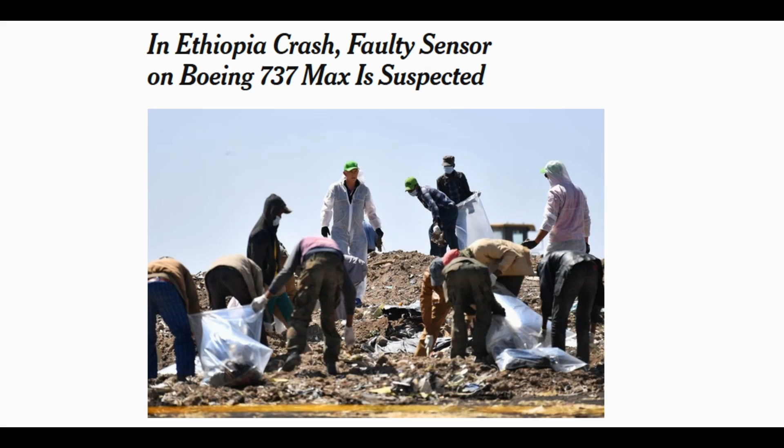Today I'm going to talk about what's going on with the 737 MAX. As you probably already know, the 737 MAX, the latest plane from Boeing, has suffered 2 fatal crashes in the last 6 months, and the news media is blaming something called MCAS.

Now, if you've been following this as closely as I have, you're not going to learn anything new here. But if you're only getting bits and pieces of the story, or if you're confused by what you're hearing, maybe I can untangle some of that spaghetti.

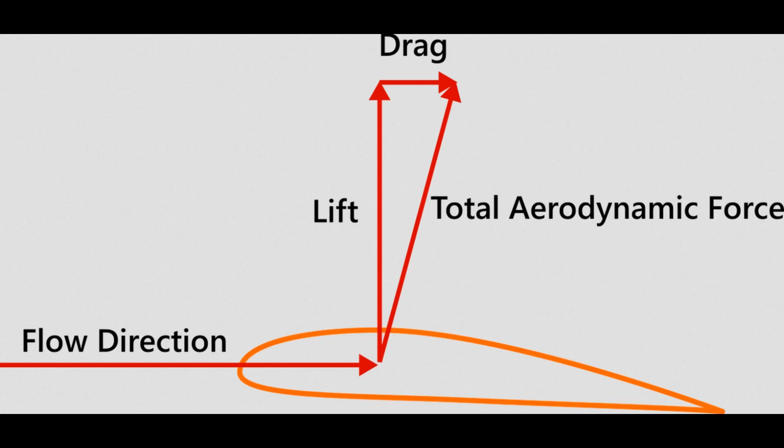I need to begin with some basic aeronautical engineering 101. Now, for you old hats with airplanes, this is going to be nothing new. You can skip ahead a little bit, but we need to understand some basic aeronautical principles before we can understand what the problem with the 737 MAX is.

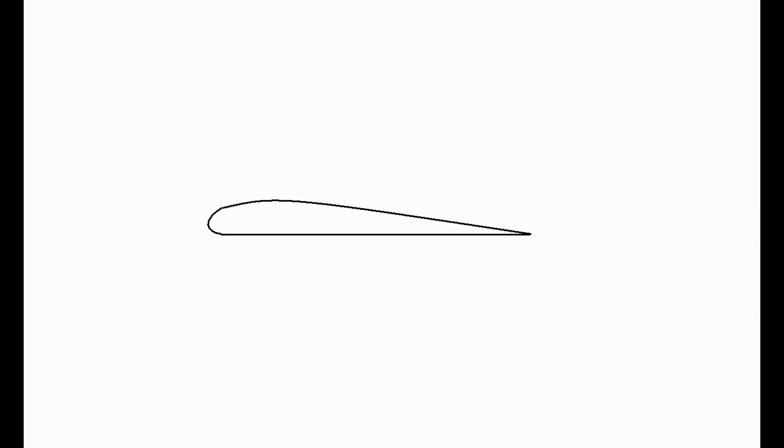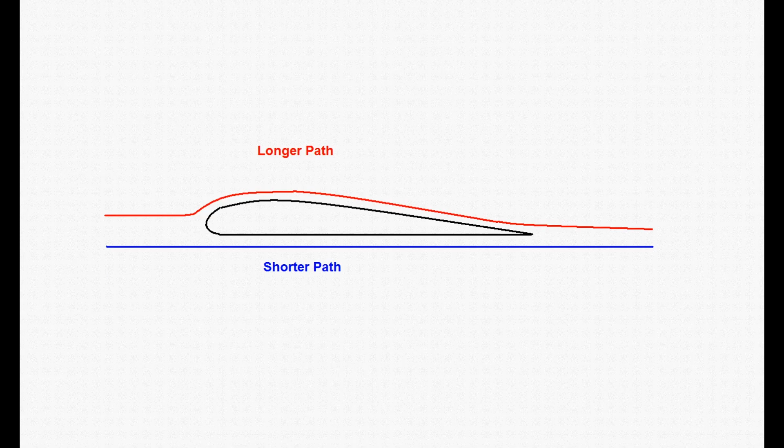I need to start out by getting rid of an old myth, and that is what makes an airplane fly. Now, what you've seen in textbooks and heard on the science shows is only a small part of the story, and that story is that an airplane flies because of the shape of the wing. The story is that the air going over the top of the wing, which is more curved than the bottom of the wing, has to go a greater distance and therefore has to go faster than the air going over the bottom of the wing.

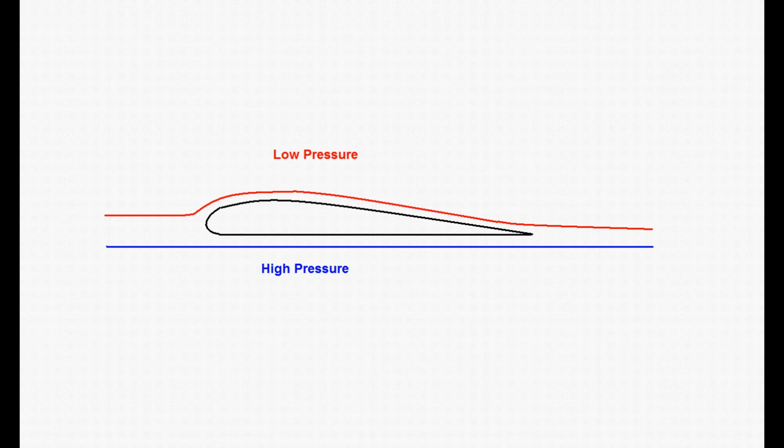And because the air is going faster over the top of the wing, it has a lower pressure, so we have a low pressure on top of the wing, a high pressure below the wing, and that causes the wing to go up. Well, this is true, but it's only a small part of the story, and the faster a plane flies, the less of the story it is.

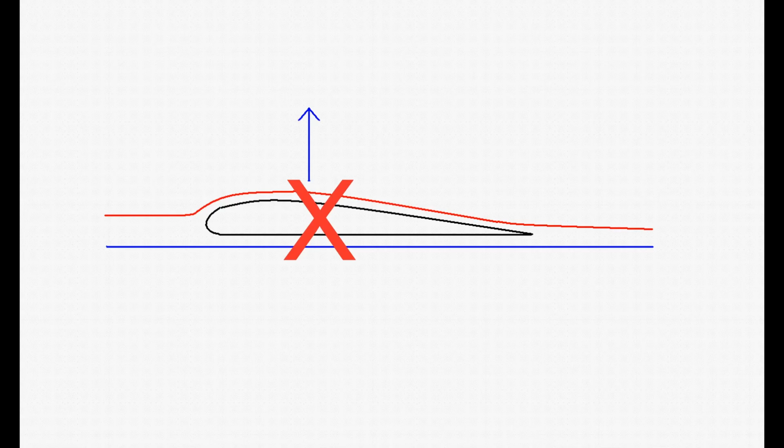So planes that tend to fly slowly have this rather highly curved top of the wing, which gives us more Bernoulli effect, but this also causes a lot of drag. So planes that fly faster have a more symmetrical wing shape and rely much less on the Bernoulli effect to fly. So what really causes an airplane to fly?

The main force, especially on planes that fly at higher speeds, is the fact that the wing diverts the air downward as it goes through the air. So the wing deflects the air downward, and because of Newton's third law of motion - for every action there is an equal and opposite reaction - pushing the air down pushes the wing upward.

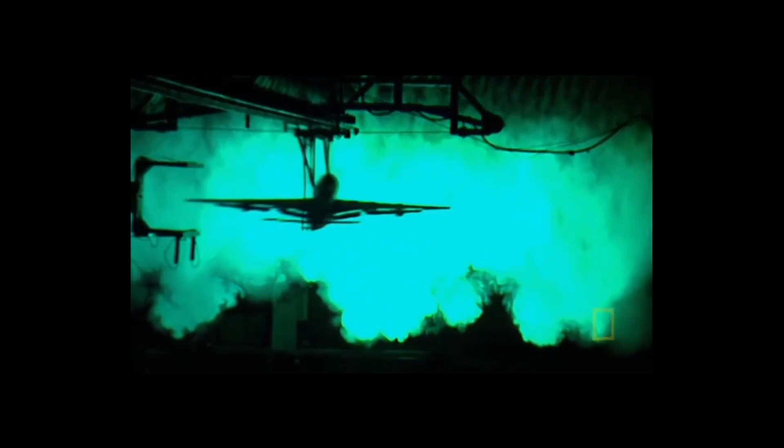And we can see this in this quick video here showing an airplane going through a fog curtain. Look at how much the air is pushed down as the airplane moves through the fog curtain.

So an airplane flies for much the same reason that a rocket flies. A rocket forces gases out the back, and that causes the rocket to go the opposite direction. The wing of an airplane forces air downward, and that causes the wing to produce lift, which makes the airplane fly.

The idea is to fly in level flight. You want the wing producing exactly the same amount of lift as the weight of the airplane so that the plane will stay in the air. To climb, we have to produce more lift, and to descend, we have to produce less lift.

There are 2 ways to change the amount of lift the wing produces. One is to change the speed. So if you go faster, the wing produces more lift and the plane will tend to climb.

Or you can change the angle of the wing to the oncoming air. This is called the angle of attack, not to be confused with the pitch of the airplane. The angle of attack is the angle the wing strikes the air as opposed to the angle that the whole airplane strikes the air.

So as you increase the angle of attack, or the angle of the wing to the air, you produce more lift. So at the same speed, to produce more lift, you need to angle that wing upward. As we increase the angle of attack, we increase the lift, but this only works up to a point.

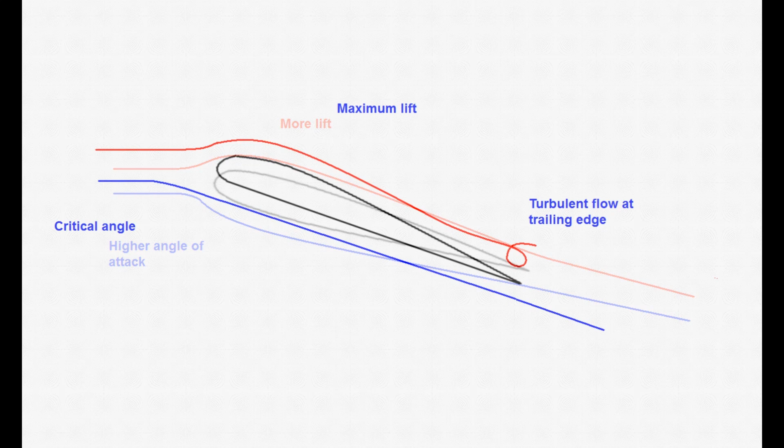When we reach a certain angle, known as the critical angle, increasing the angle of attack no longer increases the lift, and then we reach a point where increasing the angle of attack decreases the lift, and this is called a stall. Depending on the design of the wing and the speed and other factors, this stall can be rather mild or rather abrupt.

In fact, a lot of modern planes are designed with the wing twisted in such a way that the root of the wing will stall first, easing the abruptness of a stall and also giving the pilot some warning that the plane is stalling.

And in fact, some of the turbulent air that comes off the wing during a stall will cause the plane to shake. Modern commercial aircraft have what's called a stick shaker, a motor attached to the controls to enhance this shaking and let the pilot know the plane is about to stall. Regardless of the cause or severity, stalling an airplane is a bad thing, unless we are stalling a light plane to practice recovering from stalls.

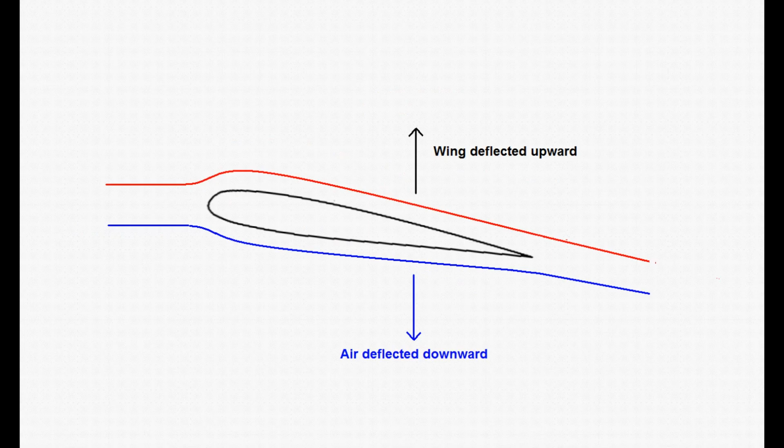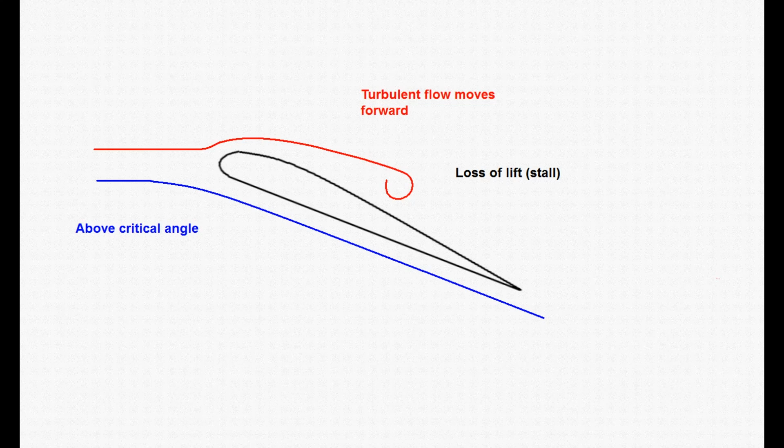So what we have learned so far is that an airplane flies because the wing deflects the air downward, and the higher the angle of the wing to the oncoming air, the angle of attack, the more lift we have, all other things being equal. But if that angle gets too high, we lose our lift and the plane falls, which is a bad thing.

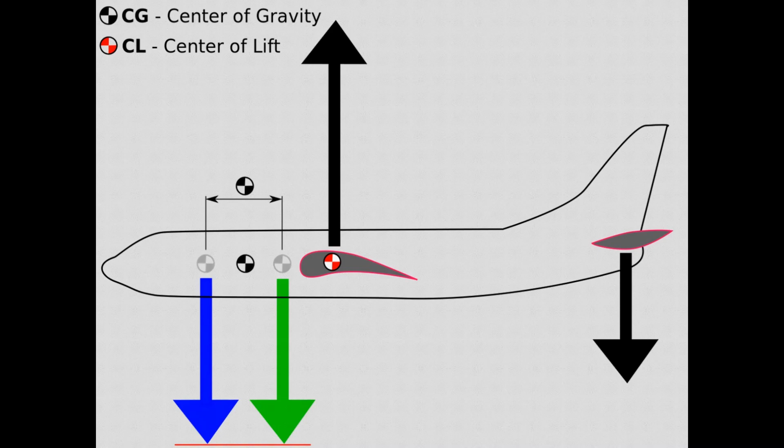The next thing we need to look at is the stability of the airplane. A plane is stable when, if it departs from straight and level flight, it will tend to return itself back to straight and level flight. Most airplanes are designed with stability in mind. Military fighters aren't so stable because we want them to be maneuverable, but a passenger plane needs to be stable.

In most aircraft, the stability of the pitch angle, that is the up and down angle of the nose of the plane, is provided by the horizontal stabilizer, which a lot of people might call the back wing of the plane. If the plane pitches up or down, the oncoming air will push on the stabilizer and cause the plane to go the opposite direction.

So here we see the plane is pitched up. The wind is hitting the horizontal stabilizer in such a way that it produces lift. Notice it has a high angle of attack, and that will lift the tail back up. And of course, if the plane's nose goes down, we have the opposite effect, where the lift of the horizontal stabilizer is negative and tends to push the tail down. So the horizontal stabilizer keeps the plane stable in the vertical or pitch angle.

Now, passenger planes must be designed to be stable under all flight conditions. We don't want the plane getting into a condition where it becomes unstable, in other words, where it wants to depart from straight and level flight. So what we don't want is some condition that causes the plane to pitch up, because that will increase the angle of attack, and if we are already close to the critical angle, the plane could pitch into a stall. So that has to be avoided.

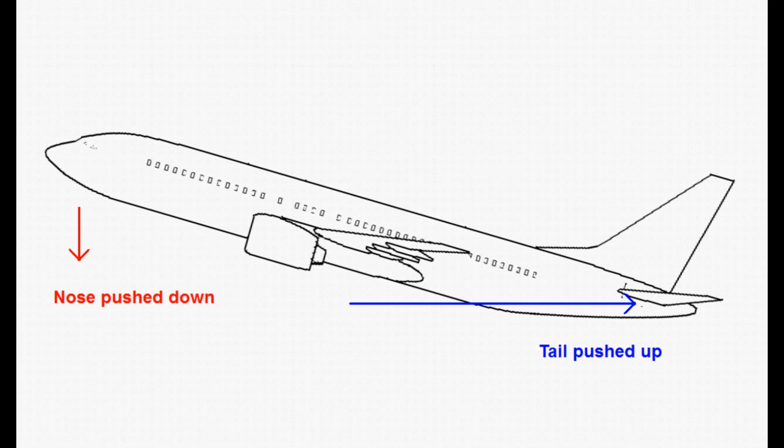So one thing that is an absolute must is planes must be designed to be stable. Basically, under whatever conditions are happening, if the pilot lets go of the controls, the plane will return to straight and level flight. And just a quick spoiler here, this is the problem with the 737 MAX. I'll talk about it in a moment, but there are conditions where the nose can pitch up, and that had to be solved. But before we talk about that, let's talk about flight efficiency.

The fuselage and engine nacelles of an airplane also produce lift. Anytime they are angled in such a way that the air hits them and is deflected downward, they are going to produce lift. But they are not efficient lift producers. The wings are designed to be very efficient lift producers. They are long and narrow. That's called a high aspect ratio.

And that produces lift more efficiently. In other words, its lift to drag ratio, the amount of lift it produces compared to how much drag it induces, is much higher than something shaped like the fuselage or engine nacelles.

So when the plane is cruising, we want the fuselage to be flat to the oncoming air so that it produces no lift, and the same thing with the engine nacelles. We want them to produce no lift. So the plane is designed so that in cruising flight, the fuselage and engine nacelles are flat to the oncoming wind, and the wing has a slight angle of attack, the angle most efficient for cruising speeds and altitudes. So we have what's called an incidence angle, which is the angling up of the wing compared to the fuselage, to give the wing an angle of attack when the fuselage does not.

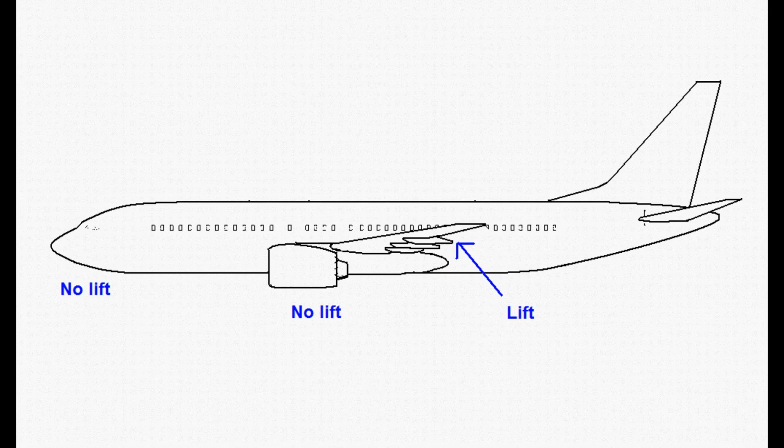When the plane is flying more slowly, such as shortly after takeoff or when coming into land, we have to increase the angle of attack of the wings to produce more lift at the lower speed. Well, to do that, we have to raise the nose of the whole airplane. Now, the fuselage and the engine nacelles are also producing lift.

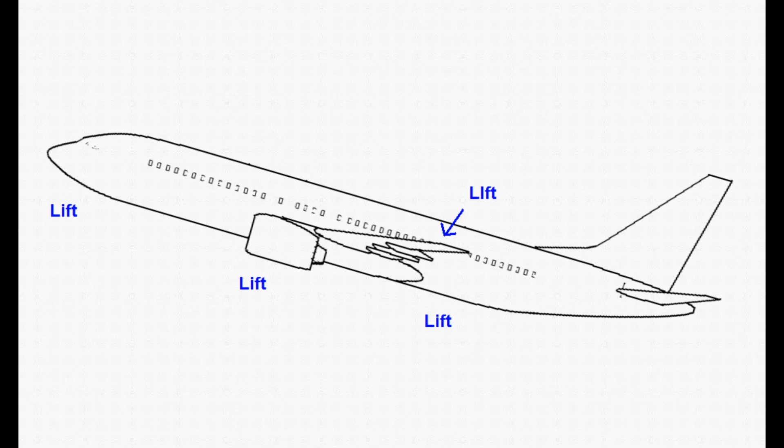Here's the problem with the 737 MAX. The original 737 was designed low to the ground and designed around the Pratt & Whitney JT8D engine.

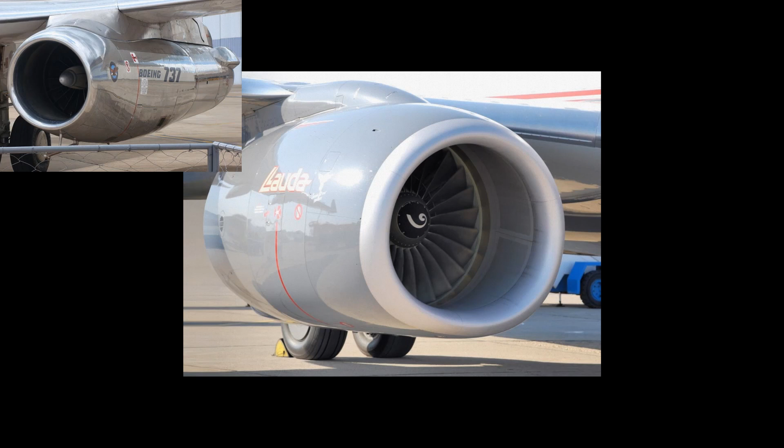To improve fuel economy, they adapted the CFM56 engine to later versions of the 737. To do this, they moved the accessory package to the side of the engine so they could flatten the bottom of the nacelle, and then to increase ground clearance, they had to raise the engine. But to raise the engine, they had to move it forward a little bit to clear the leading edge of the wing. They were able to do this without causing any stability problems of the airplane.

However, the LEAP engines that are put on the 737 MAX are even larger diameter than the CFM56, so to make them fit, they have to raise them even higher above the ground, and to clear the leading edge of the wing, they have to move them just a couple of inches forward of the CFM56 engine.

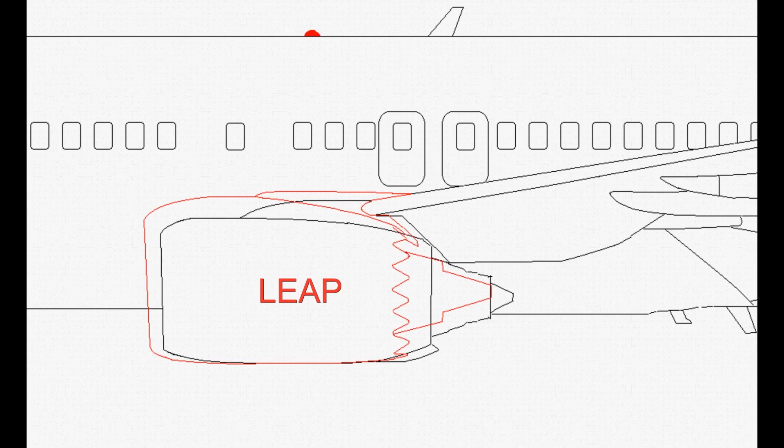The position of the LEAP engines on the 737 MAX tips the stability scales just barely in the wrong direction under just the right conditions. So under slow flight, with a high and increasing angle of attack, with the flaps retracted and the engines at high power, the wind can catch the engines just enough to pitch the airplane up and cause it to stall.

You simply cannot have an airplane doing this, so it would have been impossible to adapt the LEAP engines to the 737 except for modern computers. Boeing designed software to monitor the airspeed, the flap position, the engine thrust, and the angle of attack, and to keep the plane from going into the condition where the engines could cause the nose to pitch up.

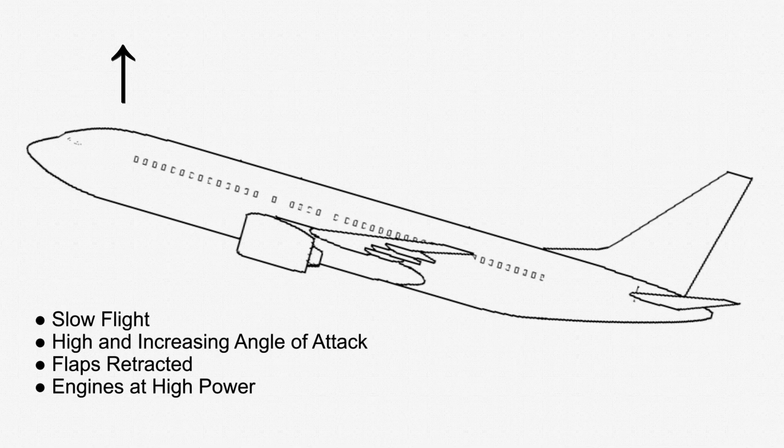It does this by operating the elevator trim, which is a motorized jack screw that moves the entire tailplane up and down. It will move the trim to the full nose down position if necessary to keep the plane from getting into the condition where this pitch up could occur. This all happens entirely automatically, without the pilot's intervention or his knowledge.

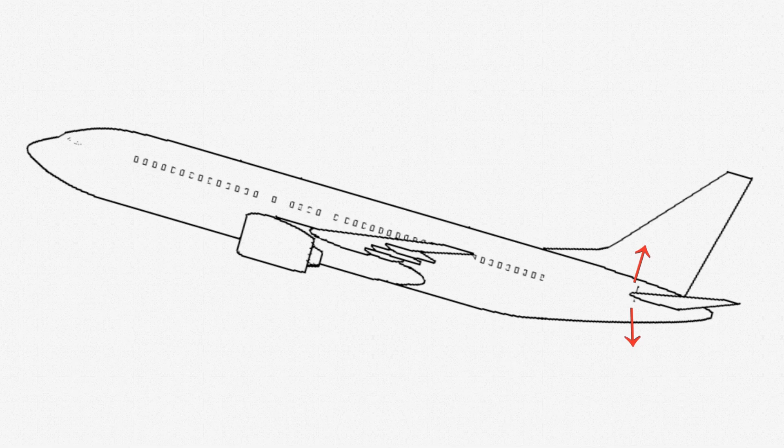What appears to have happened in the case of the two crashes is that the one angle of attack sensor that the MCAS system monitors appears to have given faulty information, causing the elevator to go into the full down position, and the pilots were unable to recover.

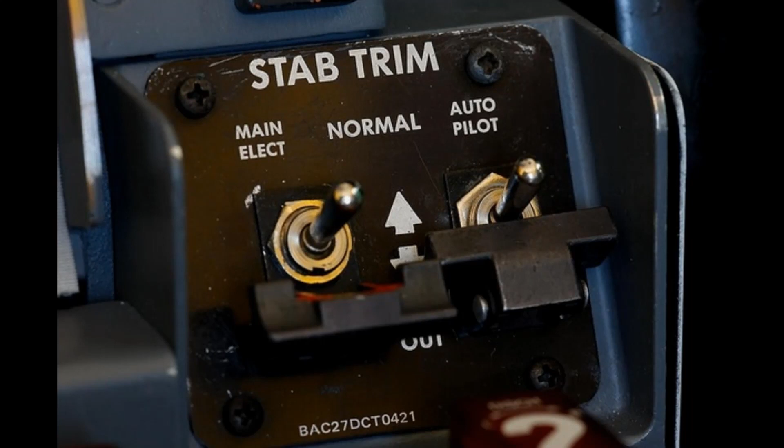So how could Boeing put such a system on their airplanes and not tell pilots about that and not train them in what to do in case it fails? Well, it turns out that an MCAS failure has the same symptoms as a trim runaway and has the same solution. The solution is to place the trim cutout switches in the cutout position. This cuts power to the jack screw motor and disables MCAS.

And in case there's a mechanical or aerodynamic problem still causing the trim problem, the next solution is to grasp and hold the trim wheels to keep the trim runaway from continuing.

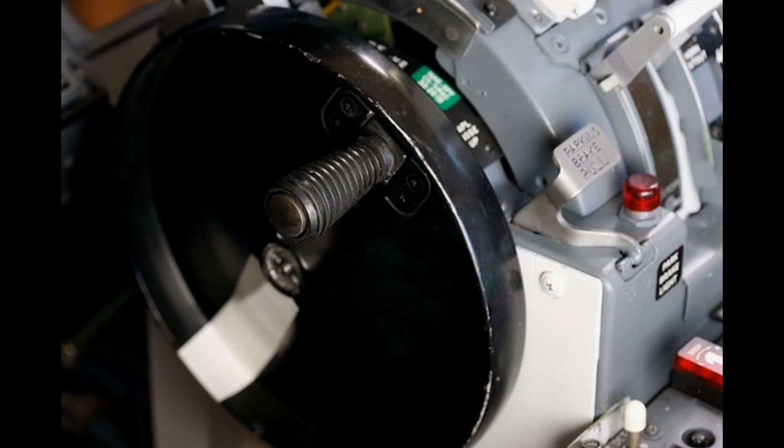Therefore, the MCAS should require no extra training. Handling a trim runaway is part of standard pilot training, so by default they are already trained to handle an MCAS problem. In fact, the day before the Lion Air crash, the same plane had an issue with its MCAS system,

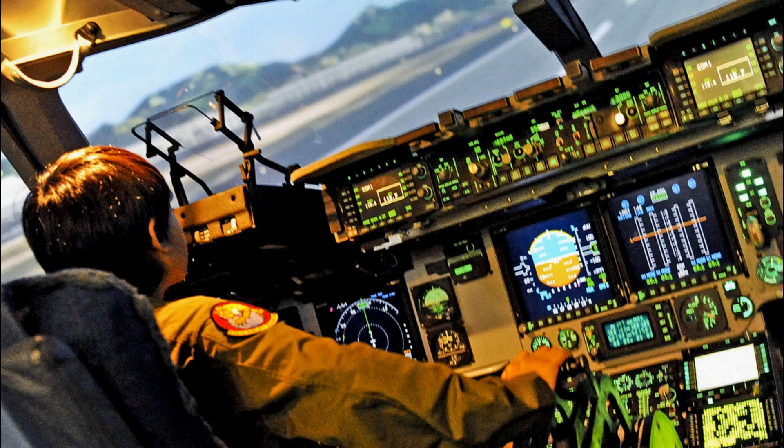and there was a third pilot on the flight deck who told the flying pilot to put the trim cutout switches in the cutout position, and that solved the problem. Whether that problem was reported and anything was done about it, we don't know, but we do know that one pilot did know what to do when the problem happened.

So what's the bottom line? Well, we won't know that until the final crash reports come out, but I think it's going to turn out to be a pilot training issue.

Boeing is reprogramming the MCAS system to monitor both angle of attack sensors and to tell the pilots when the sensors disagree. This will certainly make the planes a little bit safer, but these are two crashes that shouldn't have happened. The pilots should have had training to recognize and handle a trim runaway, which has the same symptoms and solution as an MCAS problem, and indeed one pilot did recognize it and did do the right thing.

So what's my opinion? Well, we've had two MCAS failures in six months, and there aren't that many 737 MAXs in the air right now, so I think that's too many. So they do need to modify the system to be more robust. But in the end, I think the planes were safe to begin with, and the problem comes down to improper training of the pilots. We won't know for sure until the final crash reports come out later on this year.